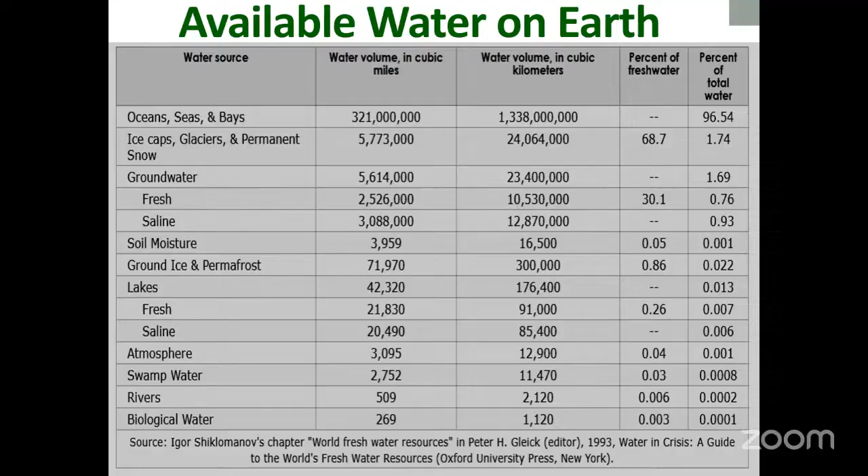India is coming into lower income and lower middle income, though upper middle income it will come. So there's no problem, we have some treatment, around 20 to 30% of treatment already going on in India, and further progress is going on.

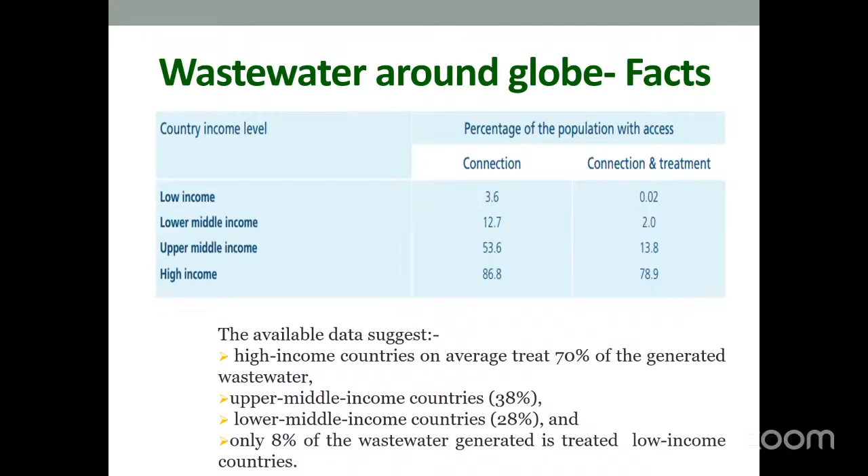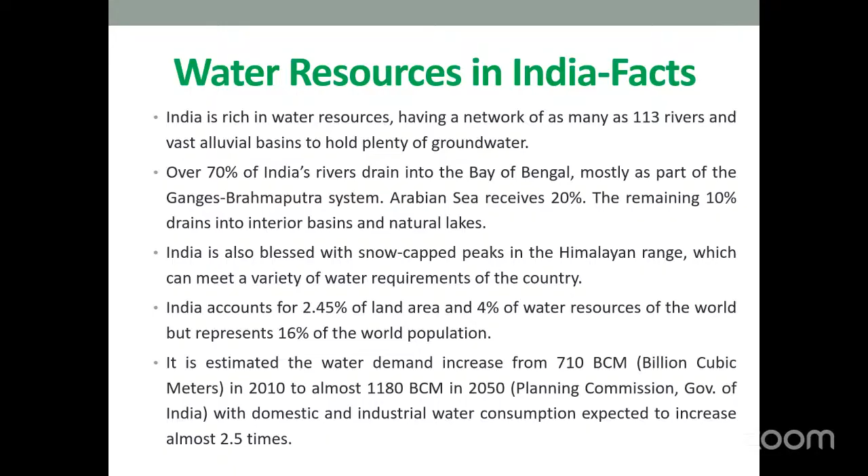Once we understand wastewater treatment is highly essential, we should understand the basics of wastewater, basics of the treatment plant, and basics of the design. After completing your course, if you join any treatment plant, you will have a full idea of how the treatment plant works. Some of the basics only we can first understand, so in this class we will discuss some of the basic concepts.

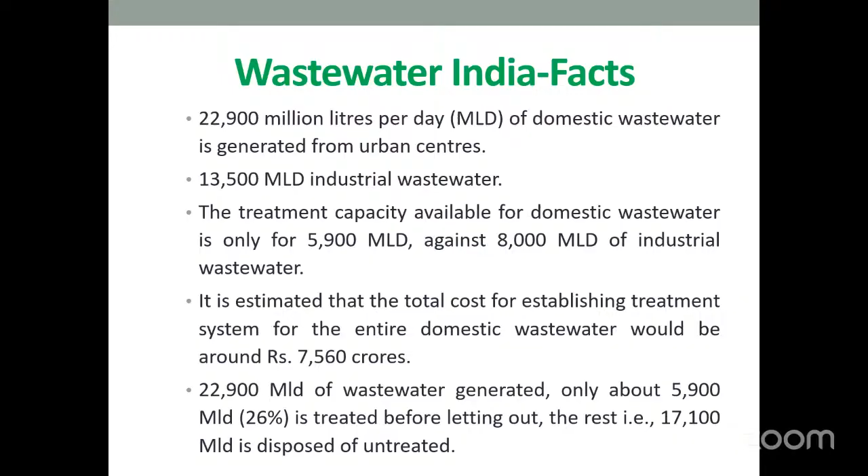Water resources in India are very less, we know this well. Clean drinking water is very less, and of course sanitation facilities are slowly developing. So diseases are possible like typhoid, cholera, gastroenteritis, bacillary dysentery, hepatitis, polio, amoebic dysentery. So many diseases are waterborne diseases.

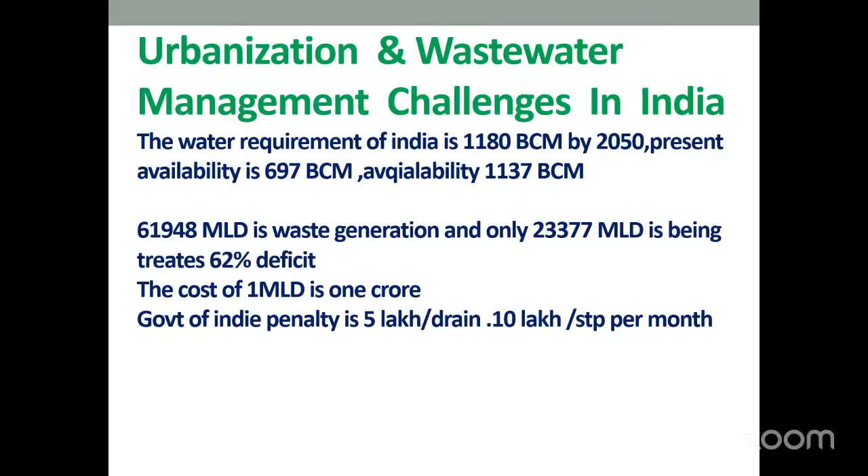Directly we'll go for what is wastewater. Wastewater may be domestic wastewater, it means anything waste material that includes liquid waste. It may be industrial waste, it may be sewage. We will discuss one by one next.

Before that, since all slides are not kept, we'll discuss some. First, we'll discuss the sources of wastewater. Sources of wastewater are three types: first is domestic wastewater, second is industrial wastewater, third is runoff.

What is meant by domestic wastewater? In our house, we utilize water for various purposes. This water after utilization becomes polluted and we discharge it. It may be kitchen waste, bathroom waste, toilet waste, or washing purposes. So many types of water are used for various purposes and all the waste is discharged into the drain, which finally goes into the sewers.

Sewers are the drainage lines which are connected to the treatment plants. So that becomes wastewater. Domestic wastewater is the waste produced in the household sector, and it is called sewage. So one is sewage, that is the domestic wastewater.

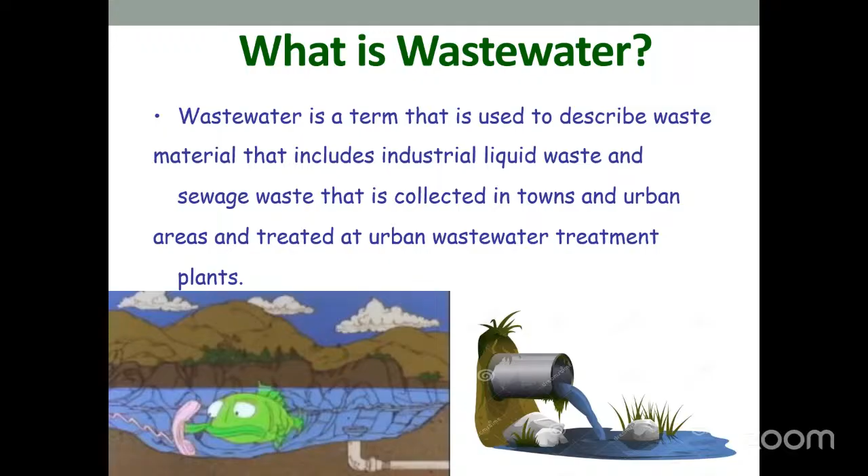Whenever water comes, water gets polluted, and it is converted into wastewater, which we have to treat. Wastewater treatment is a process where we convert wastewater into pure, treated water, no longer suitable for reuse, into effluent that can either be returned to the water cycle or released with minimal environmental impact.

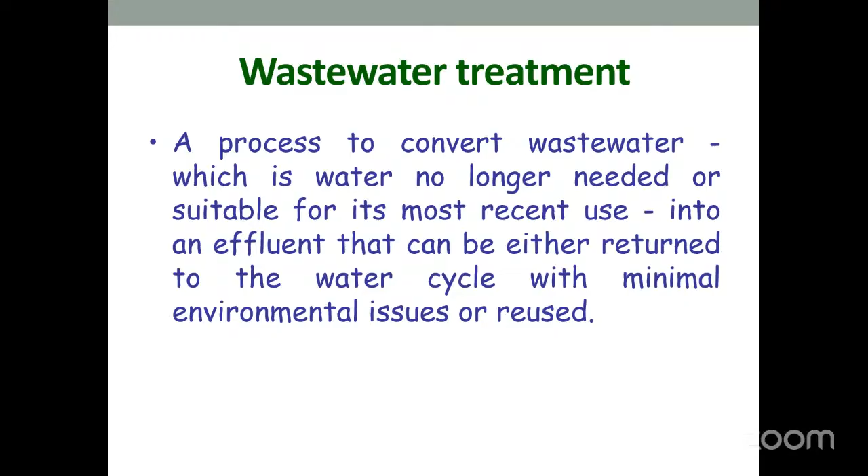After treatment, that treated water can either be used, sent to a river again for dilution purposes, used for agricultural purposes, gardening purposes, or used for your household use.

After discussing these things, the second important point in the iceberg of this chapter is characteristics. So once we've discussed the sources - sewage, ETP, effluents, grey water, yellow water - all this we've discussed now, and the components also we've discussed. So second, we have to go for characteristics. But before that, there's another word.

What is that? It's called point sources and non-point sources - one of the important sources in the column of sources. So what is a point source and what is a non-point source? Point source means the source from which waste is produced from a particular identifiable source.

For example, our household discharged sewage is a point source. Industry discharged waste is a point source. When we know this particular point, it is called a point source. If it's not there - neither domestic nor industrial - and we don't know what the source is, then that is called a non-point source. For example, agricultural runoff - I'm not sure whether it's from a paddy field or other fields.

Any water which comes from an agricultural field finally joins the river, but we don't know the exact point, so that is called a non-point source. It may be urban water, it may be runoff, it may be anything. So point sources and non-point sources we have to remember. As per the source classification, these three things we have to remember.

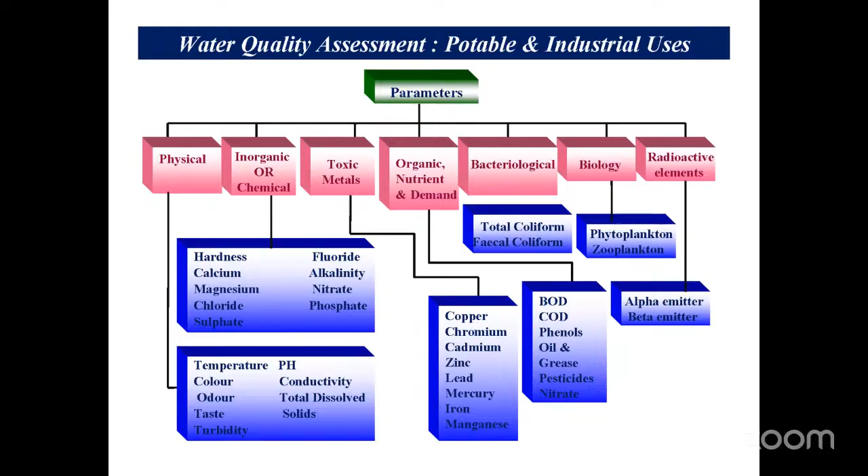This remaining part - biology, phytoplankton, zooplankton - we'll discuss later. These are the major parameters; radioactive elements need not bother us. Biology means phytoplankton means algae - in many lakes you see, algae is there. Zooplankton means fish, hydra, and so many other small organisms, mollusks, everything - so many things are present. We will discuss that part.

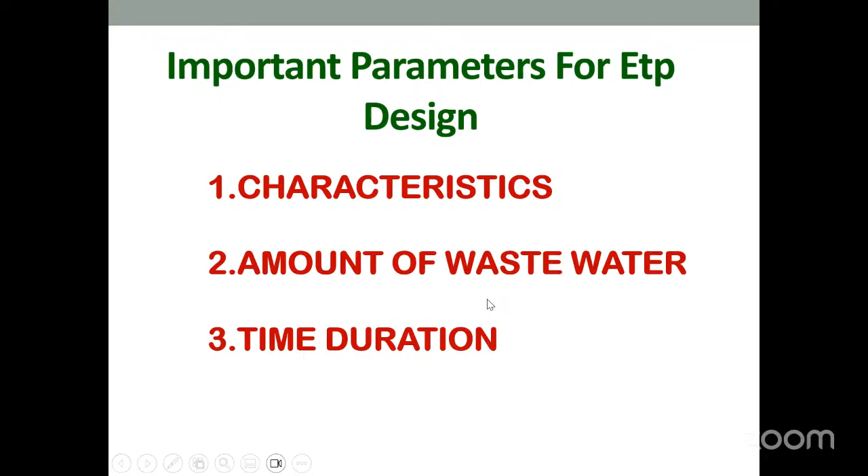So these are the parameters for treatment, characteristics we will discuss further, and amount of wastewater and time duration, how much time it will take. Let us see. First, before going to the sewage system, we have to understand how the sewage is coming from our households to industrial areas, to the treatment plant.

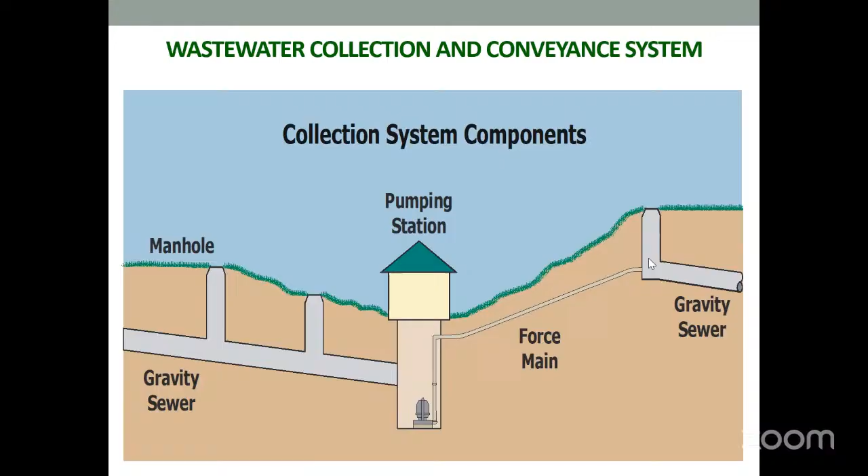If sewerage system is not there, what happens? It will be discharged through the drainage system, open drains, sometimes mixed with storm water also. In Hyderabad we see a lot of drains, nalas, are there. Nalas are actually meant for storm water drainage, but nalas are also taking the sewage, so sewage and storm water are mixing because of the improper, insufficient sewerage system in our Hyderabad. So my second point is that sewage generation is there. Generated sewage always goes through a main sewer line system into the sewer system and then to the treatment plant.

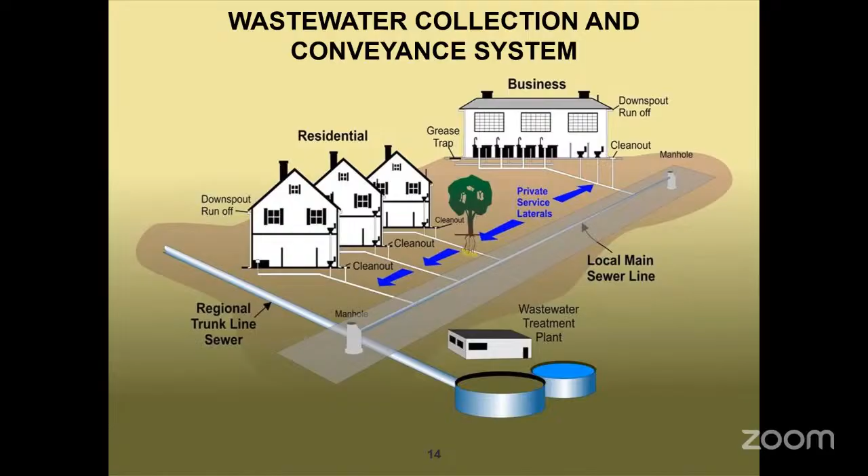But please remember, as environmental science students, you have to see that flow measurement is there. Flow measurement may be either flume or weir or some float method. So many methods are there, this is very good. Either Parshall flume, this is called Parshall flumes. This is all very okay.

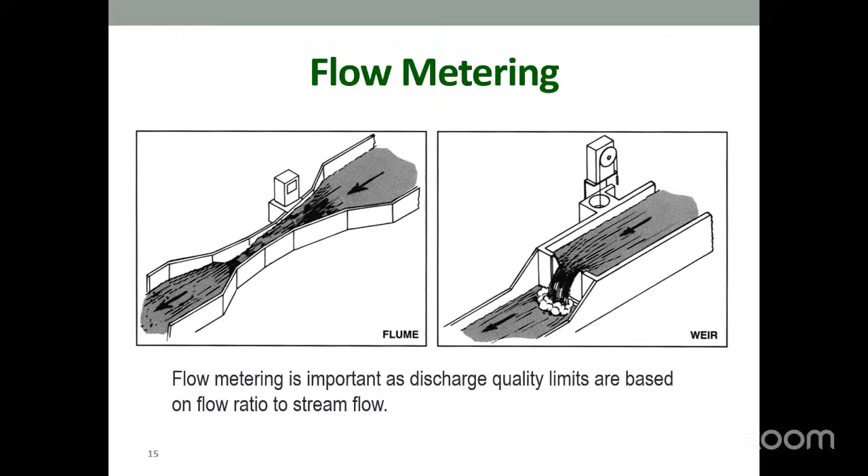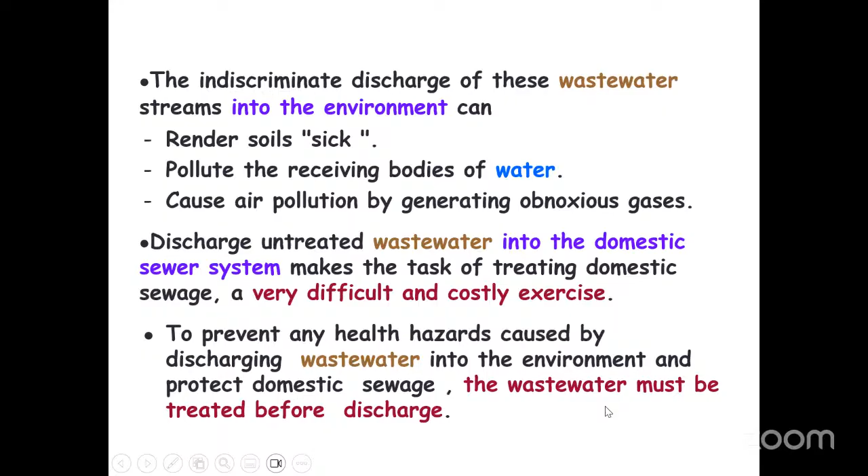Then what are the problems with wastewater? Whenever indiscriminate discharge of wastewater happens, the environment becomes sick. What is sick? Soil becomes sick. Why? Let us discuss - it pollutes the receiving body of water, becomes sick. Air pollution is also a problem. Untreated wastewater and domestic sewer make treatment very difficult and costly. So what is the problem? We have to discuss. For that purpose, first we will discuss the parameters, then only we can clearly understand.

Already we have seen suspended solids are there. What will happen? Suspended solids means, as I told already, the effluents or sewage water, domestic water, contains some small solid particles which cannot settle down. This unsettled waste, unsettled solids, are now called suspended solids. They are suspended. You have studied in water also, in previous chapters six and seven, what you have studied - that water we cannot settle. Water also will have some mud, clay or something, but where we have used alum, isn't it? Lime, alum, something we have used. So what happens? It becomes flocculation.

So all the small colloidal turbidity parts will simply coagulate - coagulation occurred, flocculation, coagulation occurred. But here we need not have coagulation, we need not add any chemical, because these particles are larger. These larger particles automatically settle down because of proper design. If it is properly designed, it will automatically settle down.

Suspended solids can be settled down easily. Suspended solids are very important and its load we have to calculate. Load means total flow, how much, how many milligrams it was. Based on that calculation, we can proceed.

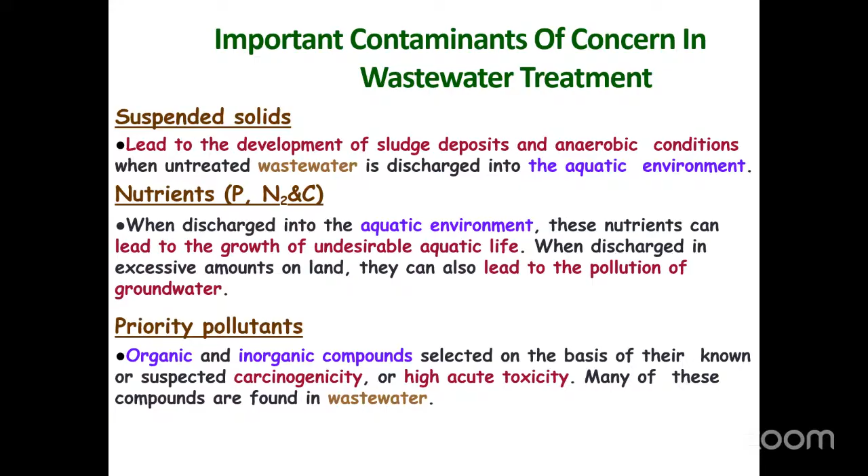In addition, we may have refractory organics. Refractory means resist to treatment, so this cannot break down. If any compound does not break down, this is called refractory. Whatever carbohydrates are taken, it is converted into carbon dioxide and water. Proteins are taken, converted into ammonia. And if phosphates are taken, simple phosphates are formed. But refractory organics cannot be broken down.

What are the examples of refractory organics? Surfactants. Can you give an example of a surfactant? Any of you? Surfactants.

Surfactants are sticky substances which obstruct the flow, or rather substances which clean the sticky area. If you use any chemical which cleans the sticky area, that's called a surfactant. For example, all our detergents and soaps are called surfactants, especially detergents. You are using Surf Excel, Ariel, all these are surfactants.

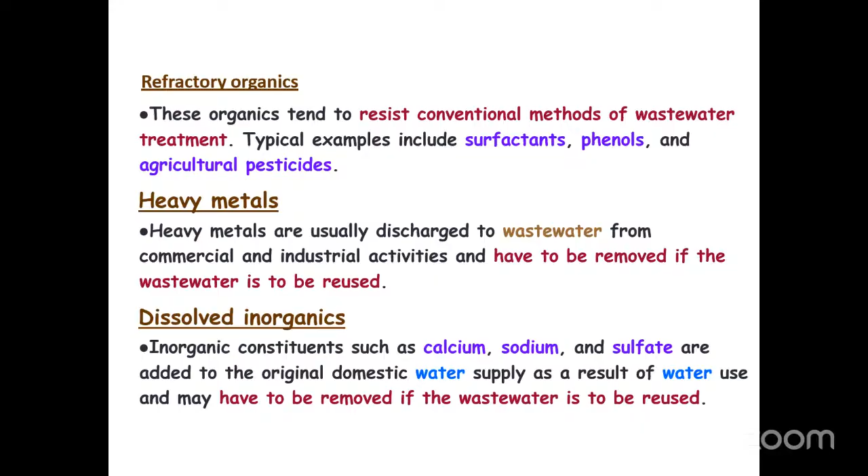So these are some parameters. Up to this we have discussed. Now we will discuss one by one the detailed classification. I told you about total solids - this will be total solids.

Total solids are divided into total suspended and total dissolved. Suspended means cannot settle down easily. Within suspended, again there are two types: settleable solids and non-settleable solids. That means if it is very colloidal or very fine, it is non-settleable, which will remain in the water only and cannot settle.

But most of the time, settling will take place. So if it is settleable, then I am happy - in primary treatment, I will remove that settleable solids. Settleable solids means which can easily settle down, so we have to remove it. All the settleable or non-settleable solids are again divided into two types: volatile solids and fixed solids.

What is meant by volatile solids and fixed solids? We will discuss now. Generally we measure solids like this: take a small amount of water, dry it at 103 to 105 degrees so all the water evaporates. The residue is called total solids.

If you only filter it, then it's called suspended solids. If it is filtered, the filtrate gives dissolved solids; the unfiltered residue is total suspended solids. So it has again four categories - I told floating matter, settleable matter, colloidal matter. You will come across volatile and fixed in the next slide.

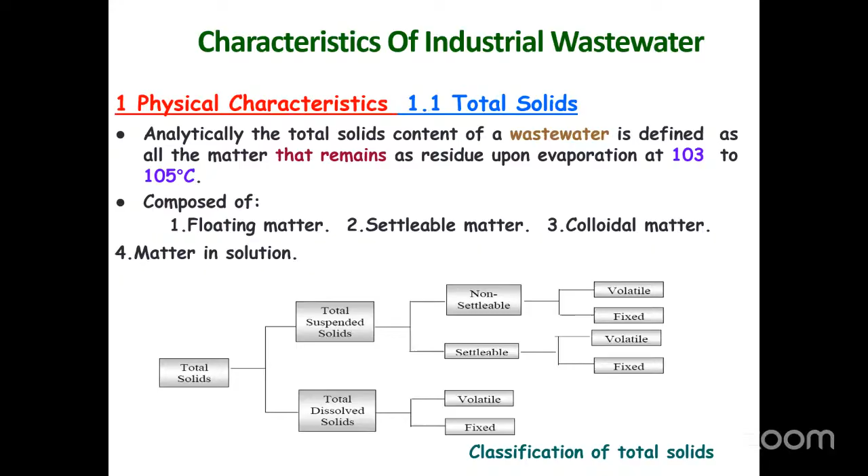First, solids are of this type. Solids are suspended and dissolved. Mainly our turbidity doesn't come across here. Industrial water we already discussed.

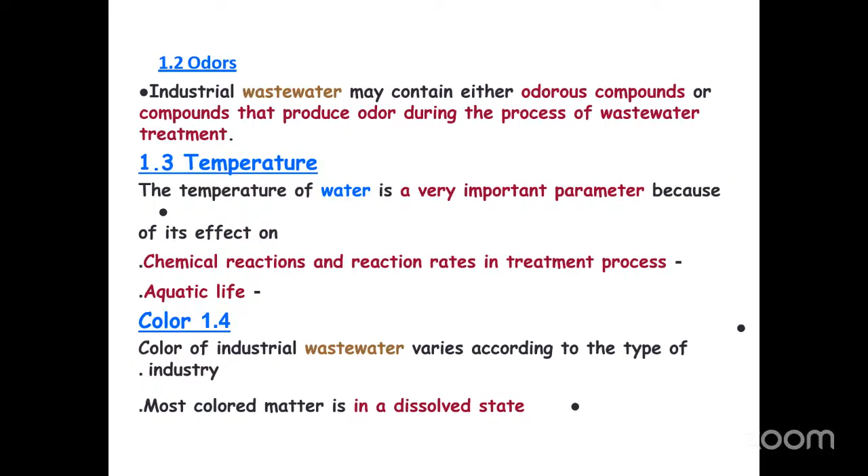Odor is very, very important. This odor may be due to hydrogen sulfide or anything. Temperature is very, very important because based on the temperature only, our biochemical reaction takes place. If temperature is very high, like 40 degrees, our treatment plant is very fast. Color, no problem. Turbidity, already I told, is very, very important in waters, especially drinking water, but not in the effluent, because effluents mostly have suspended solids, not colloidal. But colloidal also, sometimes if it is there, then that's very, very important. That will come across.

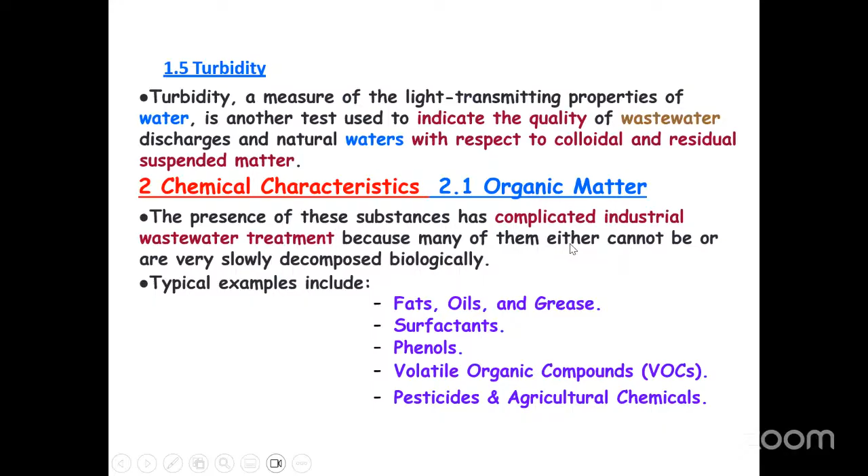Then chemical characteristics, organic matters. I told already these are the things: fats and oil, grease, FOG means fats, oils, and grease. Surfactants, phenol, volatile organic compounds, pesticide compounds are there. These are the things which are very important. These compounds, organic matter, we will discuss in detail. What is organic carbon in detail? Let's see.

What is BOD and COD? Any of you know anything about this? Yes sir, we have idea. What is the difference between BOD and COD? BOD is dissolved oxygen used by microorganisms to convert the organic matter present in the water. BOD is only used for organic matter. COD is used for both organic matter and inorganic matter. No, actually both are organic only. COD is only organic and BOD is also organic.

For example, I will give a simple example. If you take a banana, we will go to the market and I will procure one banana. The banana is about 100 grams. I want to eat it. So what will I do? I will peel it off. I remove the peel, which is around 25 grams. So what is the remaining part that I eat? 75 grams of the banana I have eaten. So the total organic matter required for eating is 100 grams, but out of the 100 grams, only 75 grams I have taken. The remaining I have thrown out. So COD and BOD are like this. You remember?

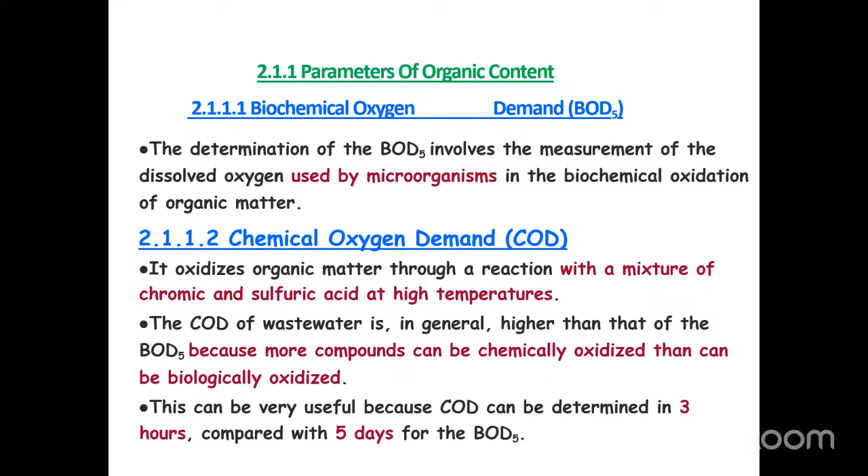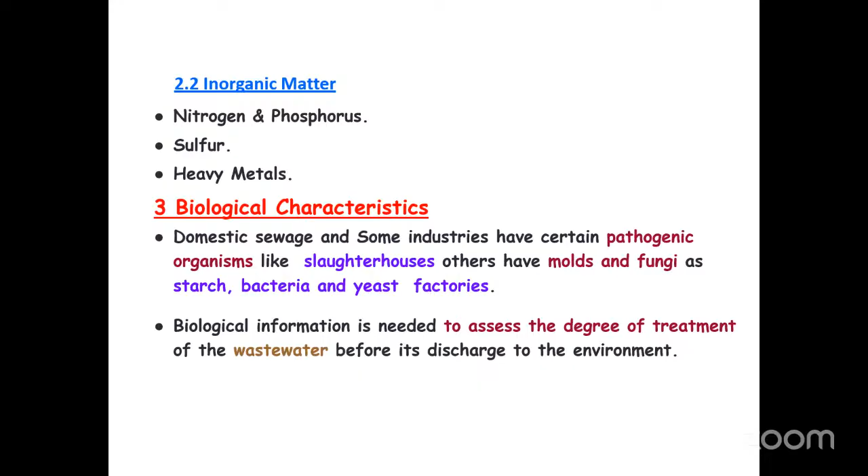ఒకసారి ఆలోచించండి, డౌట్ ఉంటే తర్వాత చెప్తాను. నైట్రోజన్, ఫాస్ఫరస్ కూడా మెజర్ చేస్తాం. నైట్రోజన్ వెరీ ఇంపార్టెంట్, ఆక్సిజన్ తీసుకుంటుంది అది కూడా. సల్ఫర్, హెవీ మెటల్స్ ఉంటాయి. బయాలజికల్ క్యారెక్టరిస్టిక్స్ ఎందుకొస్తాయో ఇంపార్టెంట్, ఆ చాప్టర్ వచ్చినప్పుడు చెప్తాను.

సో ఈ విధంగా మనకు ఇప్పుడు క్యారెక్టరైజేషన్ అయిపోయింది. క్యారెక్టరైజేషన్‌లో వాట్ ఈస్ ద క్యారెక్టరిస్టిక్స్ ఆఫ్ సివేజ్ అని అడుగుతారు. అప్పుడు ఫిజికల్ పారామీటర్‌లు ఏమేమి ఉన్నాయి, కెమికల్ పారామీటర్స్ ఏమేమి ఉన్నాయి, పాథోజెనిక్ పారామీటర్స్ ఏమేమి ఉన్నాయి అని మీరు డిస్కస్ చేయాలి.

Second is, what is the benefit? Then what to do? Now I know what are the sources. Next is the parameters. Then what I have to do - treatment. What are the treatment plants available? There are 3 things.

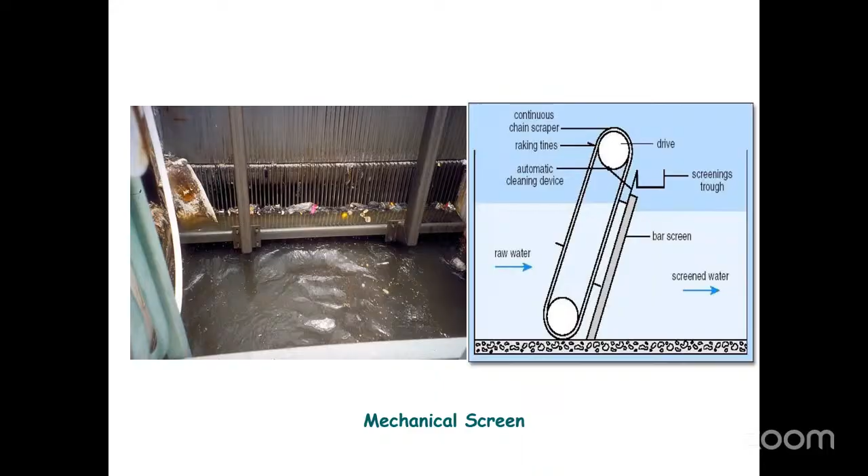So this is very, very important in oil separation, especially API separators. Inlet oil, everything - oil, water will come, oil is separated out, and remaining untreated waste will go out. So by this way, we reduce the pollution load. Pollution load is reduced by oil separation. Suspended solids need to be separated later, but first oil is important, oil needs to be separated.

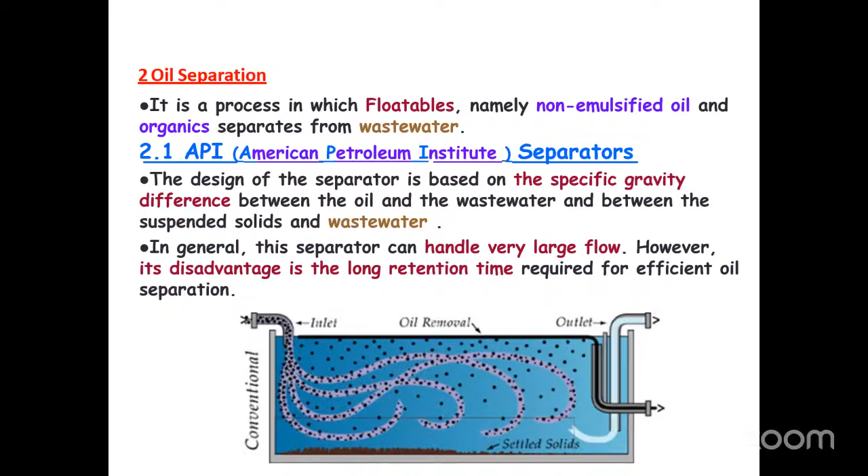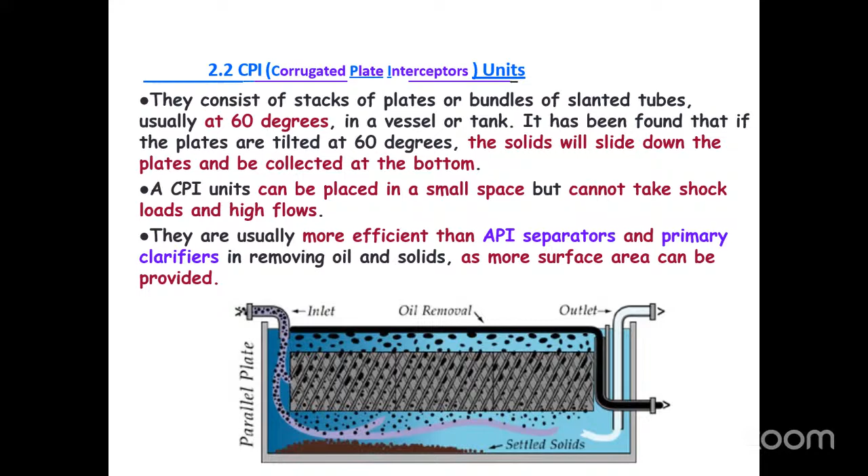So that's why this oil separation step exists. Otherwise, there is one more technique also, slightly modified. Here also, parallel plates are present, so plates will collect oil and it will come out separately. These are the different things. Then what happens?

Flow equalization - for example sewage has no problem generally, but sewage also has more pollution in the morning. In the afternoon there is less pollution because nobody goes to toilet and most jobs are done, only washings and other things remain. So we provide one more tank - highly polluted morning water, less polluted afternoon water, and highly polluted evening water - we collect everything and make it into uniform concentration. That is called flow equalization.